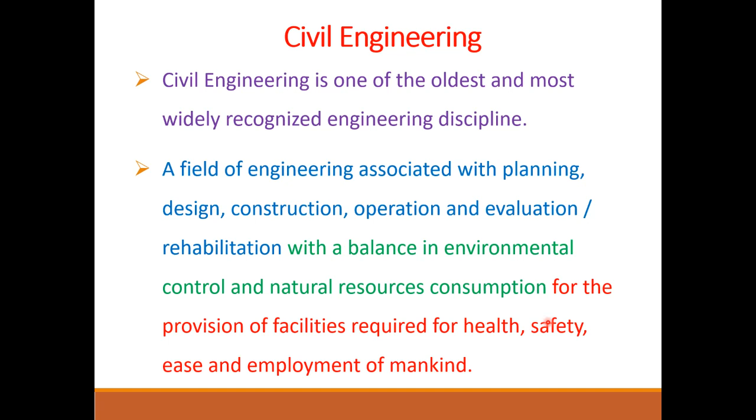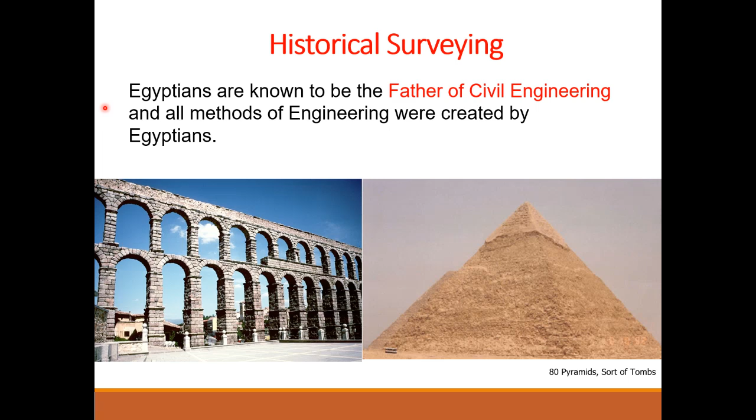Let us see some historical surveying. The earliest days in Egypt. Okay, you have already gone through these pictures. Ahram Misr, we say, historical surveying. Egyptians are known to be the father of civil engineering, and all methods of engineering were created by the Egyptians. From all the buildings of the world, pyramids seem to be the most mystical. Pyramid and secret, when typed into any search engine, will give you thousands of results without any problem, and the number of books, articles, movies, and video games with the name Pyramid in the title is not countable. But what is the mystery of the pyramids?

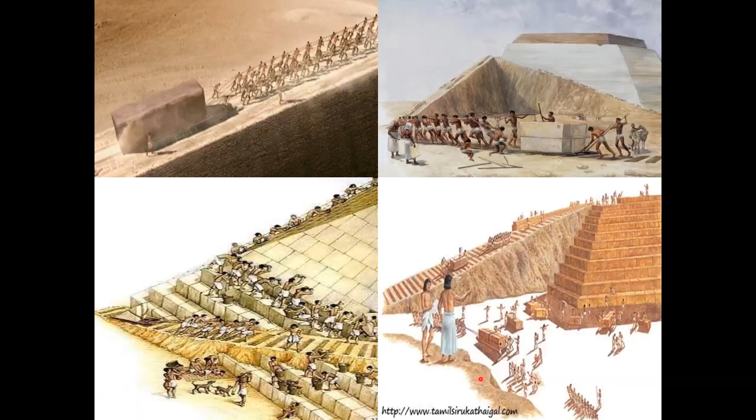So this was how the pyramids were constructed. Okay, this is an imagination. This is a hypothetical analysis of different scholars or analysts. You can say these are the assumptions that this is how the pyramids were created. You can see the size of these stones. Okay, it's a huge stone which is the unit of a pyramid. Just like we use bricks in our houses, these blocks were used in the construction of the pyramids. You can see a huge number of people that are pulling a single stone, or you can say a single brick or unit, to the specific place. So this was all the labor work that you can see in this particular slide. Now let us start with a proper definition of surveying.

Surveying or land surveying is a technique, profession, and science of accurately determining the terrestrial position of points, natural or man-made, and the distances and angles between them. Okay, terrestrial means related to the Earth, all the information related to the Earth.

In simplest words, I say that the calculation of these distances, horizontal distances, and angular measurements between these distances comes under the category of surveying. I repeat, the calculation of different distances and the angles between these distances. This is simply surveying.

Okay, distances are taken in terms of different points on the earth. These points, the calculations we are dealing with, can be natural or man-made. These mountains are natural, trees are natural, but when we talk about the buildings, it is man-made or artificial. Similarly, the canals, the dams, the bridges, all these structures are man-made.

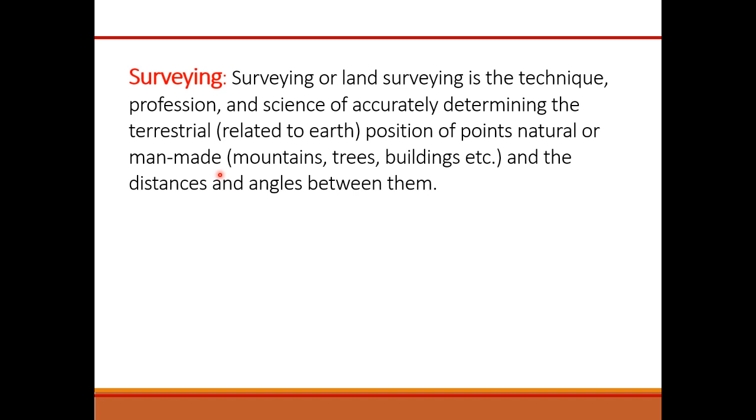Normally, determining the position in horizontal plane is called surveying. Determining relative heights or depths is called leveling. Surveying and leveling are almost the same, but there is a slight difference. Surveying deals with the horizontal calculations and leveling deals with the positions in vertical plane. Or you can say that the calculations involved in vertical heights are known as leveling.

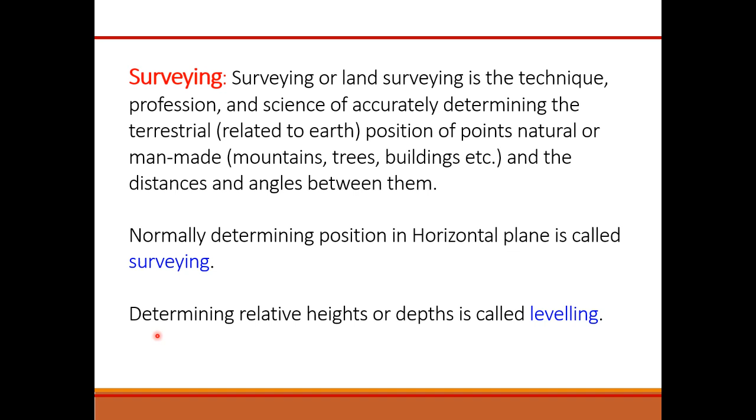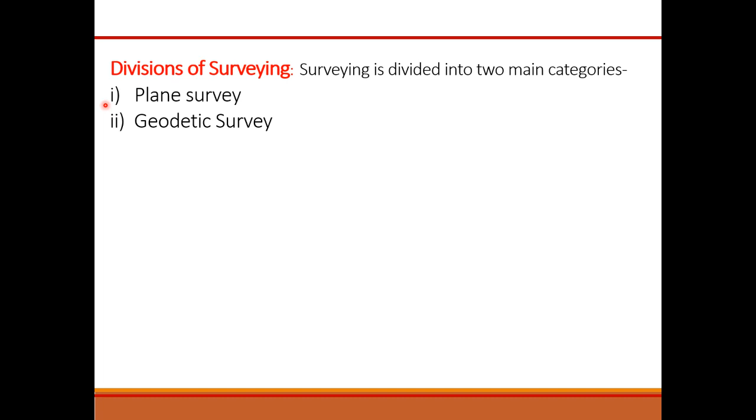Okay, divisions of surveying. Surveying is basically divided into two major categories. The first one is the plane survey and the second one is geodetic survey. What is plane survey? It assumes that the earth is flat. For small projects covering an area less than 250 square kilometers, earth curvature is not counted in distances. Earth's surface is considered as flat, not curved, not in 3D, not in spherical shape.

Geodetic survey. In this type of surveying, Earth is considered to be spherical. When the survey extends over large areas equal to or more than 250 square kilometers and the degree of accuracy is also great, the curvature of Earth is also taken into account.

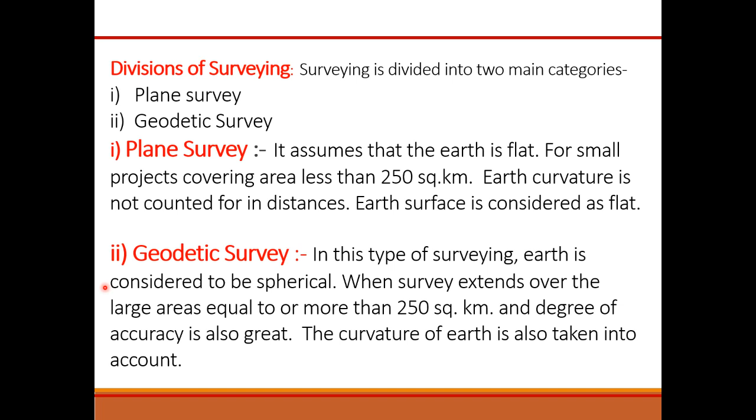Now we are going to discuss the basic differences between plane surveying and geodetic surveying. In a triangle having an area of 75 square miles, the difference between the sum of the three ellipsoidal angles and three plane angles is only about 1 second. What does it mean? If you assume a triangle of 75 square miles and take two different sets of angular readings, one the plane angles and the other the three ellipsoidal angles of a triangle, meaning three-dimensional and two-dimensional angles, there would be a difference of only 1 second.

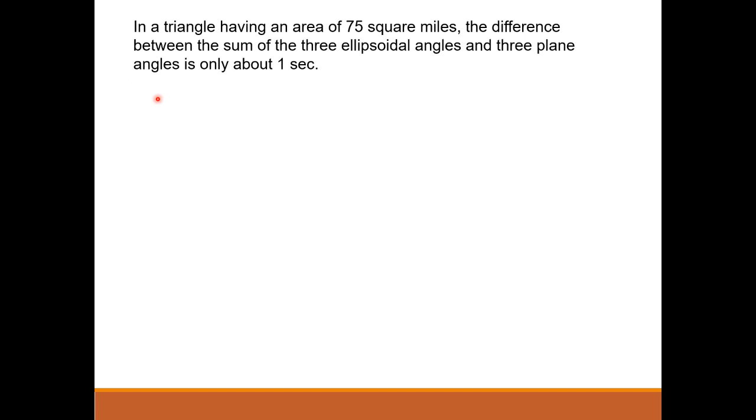Plane surveying and geodetic surveying differences. First, curvature of the earth is not taken into consideration in plane surveying, while the reverse is the case in geodetic surveying. Second, in plane surveying, the line joining any 2 points of the triangle formed by any 3 points is considered as a straight line of a plane triangle, and angles formed are assumed to be plane angles. In geodetic surveying, the line joining 2 points of a triangle formed by 3 points is considered as a curved line of a spherical triangle, and angles formed are considered as spherical angles.

In plane surveying, the area of consideration is less than 250 square kilometers, while geodetic surveying is done on large areas equal to or greater than 250 square kilometers. Plane surveying requires lower accuracy, while a high degree of accuracy is required in geodetic surveying. Simple methods and instruments can be used as low accuracy is required, while in geodetic surveying, very refined methods and instruments are used.

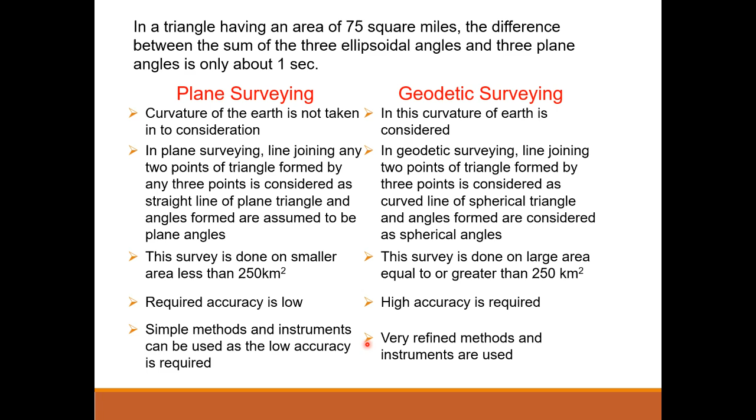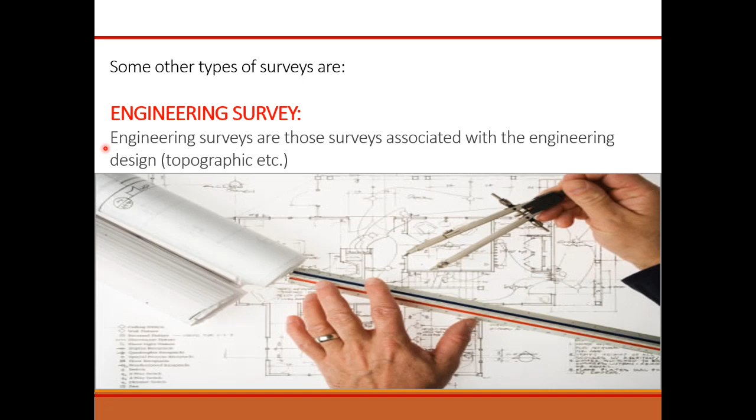Okay, there are some types of surveys. First is the engineering survey. Engineering surveys are those surveys associated with engineering design. This is also known as topographic survey. You can also define topographic surveys as those in which we collect information about the natural and man-made features of the land.

I have already discussed what the natural features can be: a stream, a lake, a forest, trees, mountains, hilly areas or plain areas. All these are natural features. While for man-made features, all civil engineering structures are called man-made structures: the bridges, the culverts, the roads, the sewerage, all these.

So strata is changed as you go deep beneath the earth. So the knowledge of earth and underneath is known as the geological survey. Next is the archaeological survey, to collect the information about the location, distribution, and organization of past human cultures.

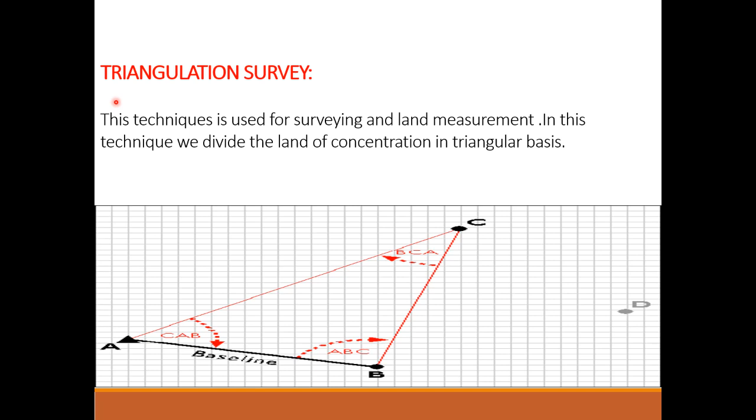Triangulation survey. This technique is used for surveying and land measurement. In this technique, we divide the land of concentration in triangular bases. Okay, the whole area to be surveyed is divided into a number of triangles, and then using all these triangles, the area is surveyed. It is a very basic and easy technique.

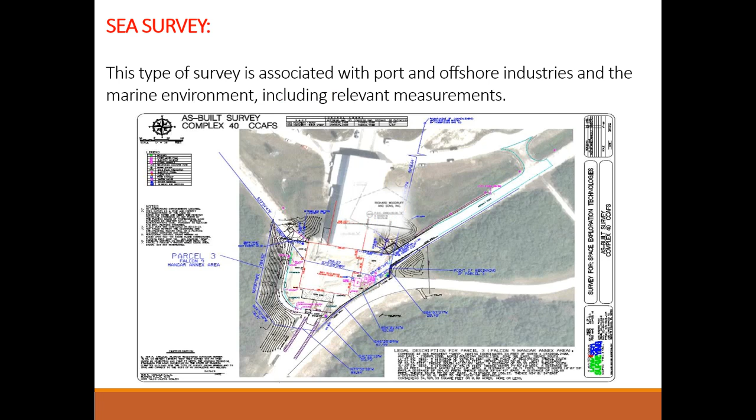Hydrographic survey. Hydrographic surveys define shorelines and depths of lakes, streams, oceans, and reservoirs, etc. Sea survey. This type of survey is associated with port and offshore industries and the marine environment, including relevant measurements. So, this is a plan view of a dock or harbor, and this is all the sea survey. Alignment survey. Route surveys are made to plan, design, and construct highways, railroads, pipelines, and other linear projects.

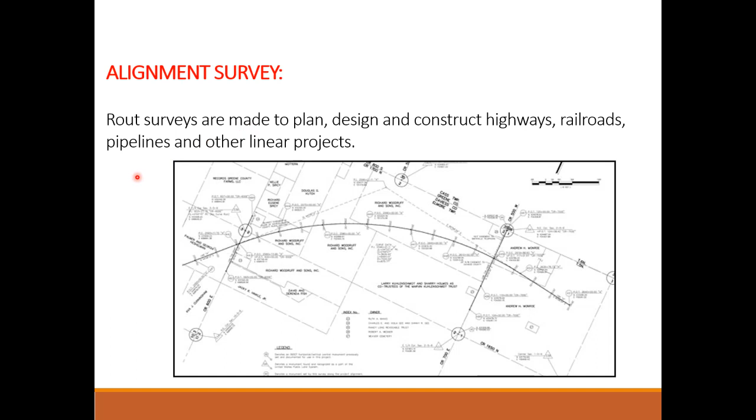Aerial survey is a geomatics method of collecting information by using aerial photography, lidar, or from remote sensing imagery using other bands of the electromagnetic spectrum such as infrared, gamma, or ultraviolet. It can also refer to the chart or map made by analyzing a region from the air.

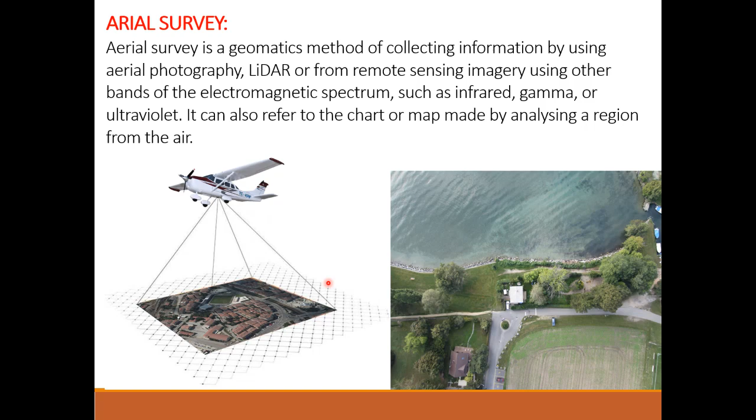Okay, so here you can see a plane is flying. In modern days, you also observe that there are different types and different models of drones. They also fulfill the same purpose that was initially fulfilled by the planes. So what does the drone do actually? This is the area it is covering. As you can see, it records the ground surface as in a video form. So this is the aerial survey. Okay, these are different photos taken by using some drone or helicopter or a plane. This is what all about the aerial survey.

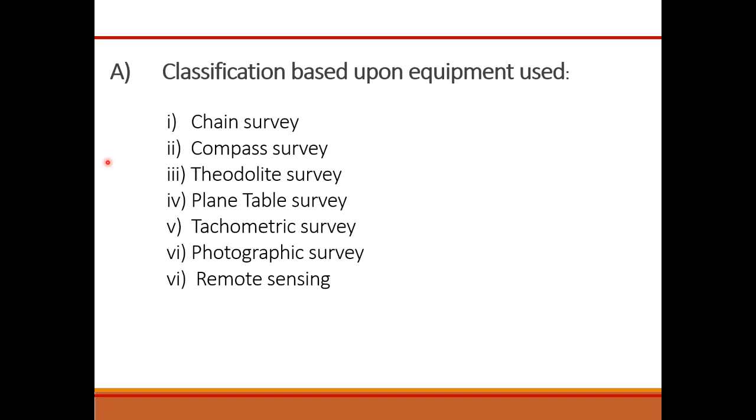Now the classification based upon equipment used. Chain survey, compass survey, theodolite survey, plane table survey, tachometric survey, photographic survey, and remote sensing. All these are different techniques that we use in survey. Based upon the method employed, the different types of surveys are triangulation: control points are established through a network of triangles; traversing: scheme of control points consisting of series of connected lines. We shall discuss all of these in very much detail in the upcoming lectures.

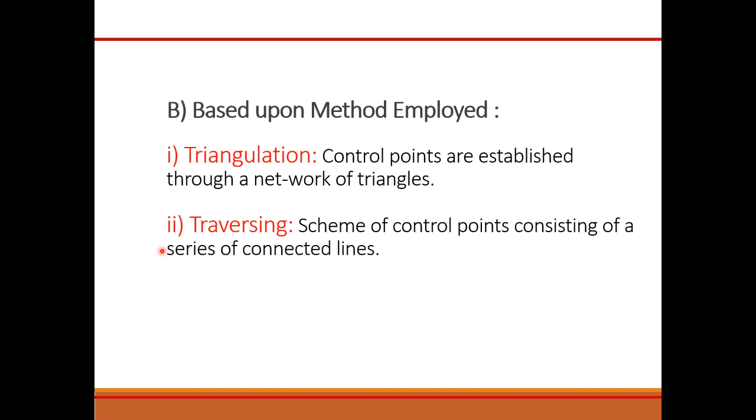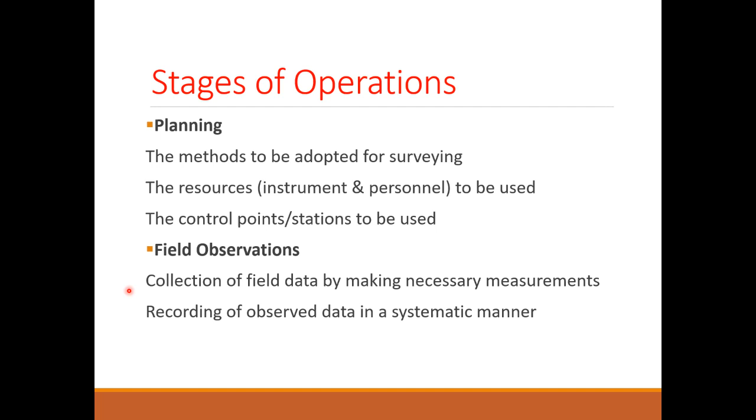Now, stages of operations. First is the planning: the methods to be adopted for surveying, the resources, instrument and personnel to be used, the control points, stations to be used. Field observations: collection of field data by making necessary measurements, recording of observed data in a systematic manner. Office works include the processing, analyzing, and calculations of observed data, preparation of necessary data for making a plan or map of the area, computation of relevant field parameters as per design for setting out engineering works at site.

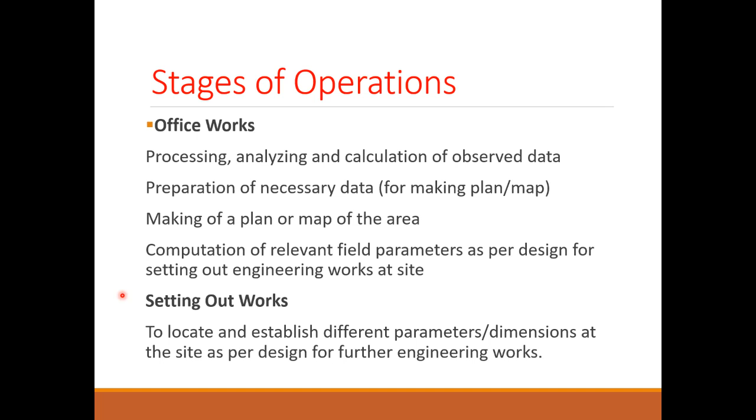Setting out works: to locate and establish different parameters, dimensions at the site as per design for further engineering works, to analyze and to calculate the field parameters for setting out operation of actual engineering works, to set out field parameters at the site for further engineering works. So all these are different stages of operations.

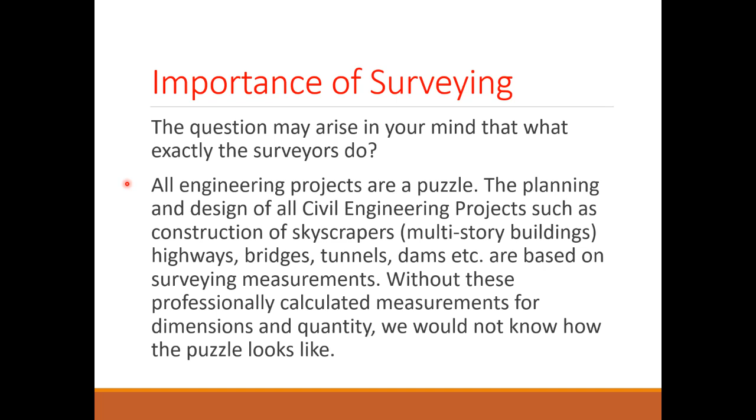Importance of surveying. The question may arise in your mind that what exactly the surveyors do. All engineering projects are a puzzle. The planning and design of all civil engineering projects such as construction of skyscrapers, highways, bridges, tunnels, dams, etc. are based on the surveying measurements. Without these professionally calculated measurements for dimensions and quantity, we would not know how the puzzle looks like. Moreover, during execution, a project of any magnitude is constructed along the lines and points established by surveying. Thus, surveying is a basic requirement for all the civil engineering projects.

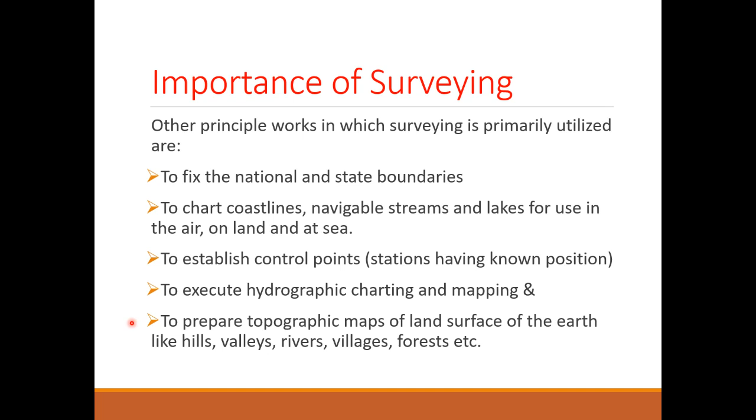Importance of surveying. Other principal works in which surveying is primarily utilized are to fix the national and state boundaries, to chart coastlines, navigable streams, and lakes for use in the air, on land, and at sea as well, to establish control points or stations having known positions, to execute hydrographic charting and mapping, to prepare topographic maps of land surface of the earth like hills, valleys, rivers, villages, forests, etc.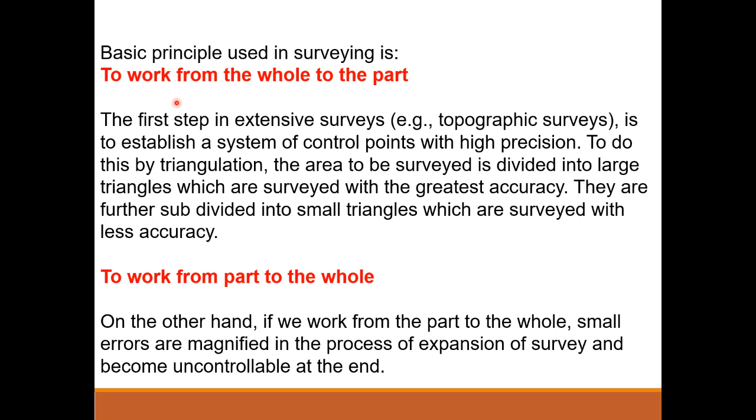Surveying safety. Surveyors, geomatics engineers, generally are involved in both field work and office work. The fieldwork consists in making observations with various types of instruments to either determine the relative locations of points or to guide the building and construction work in accordance with the planned locations.

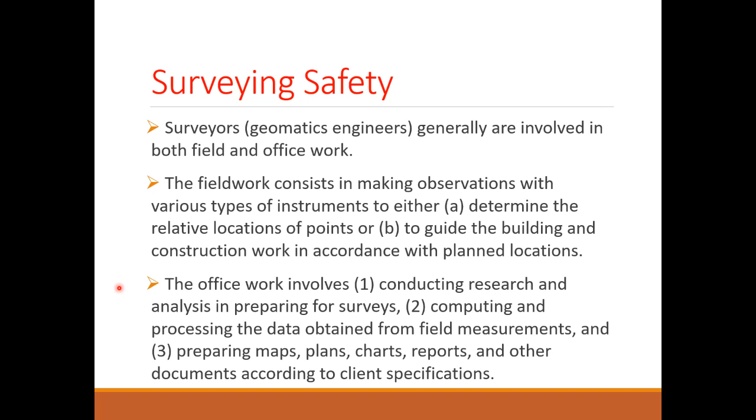The office work involves conducting research and analysis in preparing for surveys, computing and processing the data obtained from the field measurements, and preparing maps, plans, charts, reports, and other documents according to clients' specifications. Sometimes the fieldwork must be performed in hostile or dangerous environments, and thus it is very important to be aware of the need to practice safety precautions.

Among the most dangerous of circumstances within which surveyors must sometimes work are job sites that are either on or near highways or railroads, or that cross such facilities. Job sites in construction zones where heavy machinery is operating are also hazardous. In these situations, whenever possible, the surveys should be removed from the danger areas through careful planning and the use of offset lines.

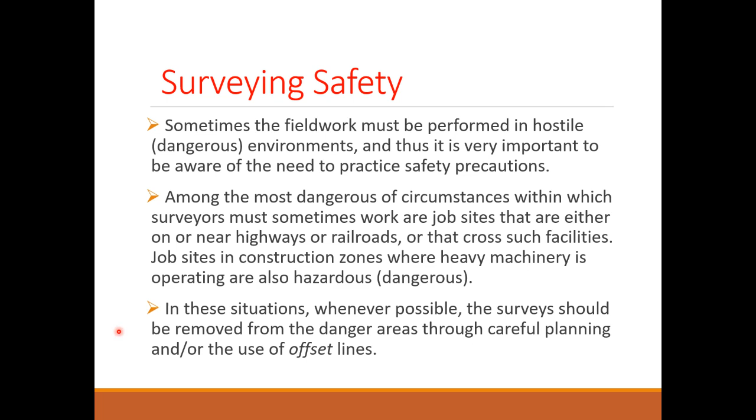If the work must be done in these hazardous areas, then certain safety precautions should be followed. Safety vests of fluorescent yellow colors should always be worn in these situations. You may have seen these yellow, orange or light green colored vests that the surveyors wear while they're performing the survey.

Above described hazards can be time dependent. These include problems related to weather such as frostbite and overexposure to the sun's rays, which can cause skin cancers, sunburns, and heat stroke. To help prevent these problems, plenty of fluids should be drunk, large hats and sunscreen can be worn, and on extremely hot days, surveying should be commenced at dawn and terminated at midday or early afternoon.

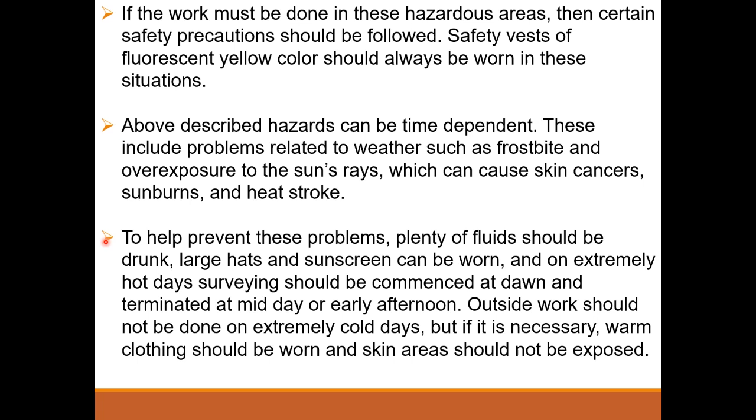Outside work should not be done on extremely cold days, but if it is very necessary, warm clothing should be worn and skin areas should not be exposed.

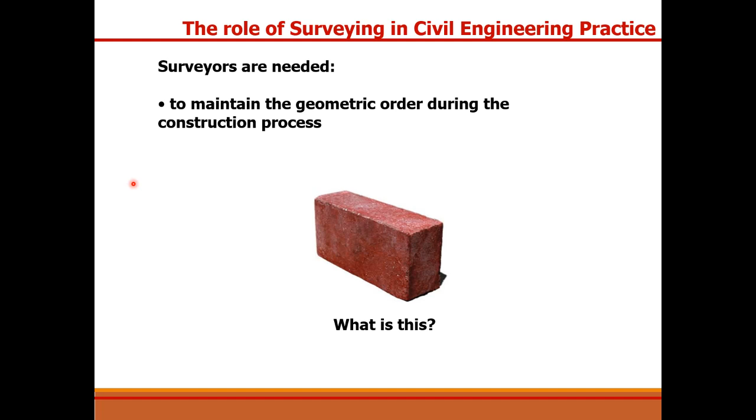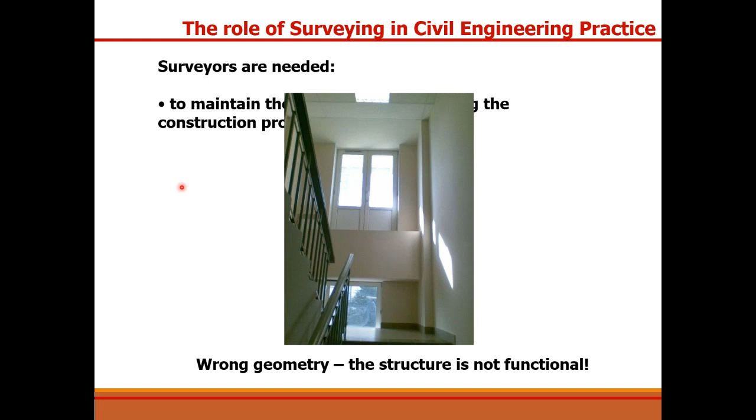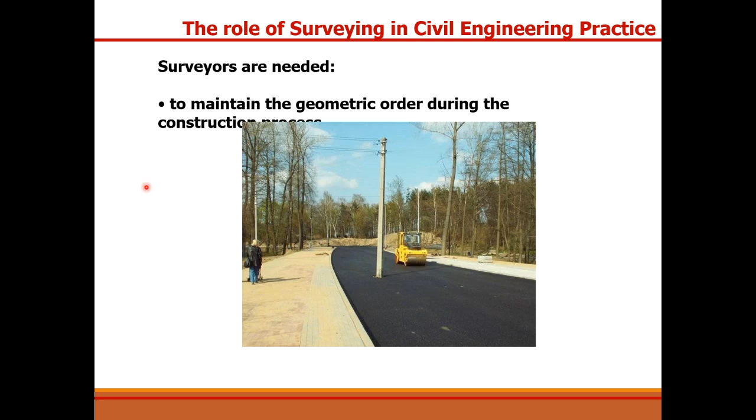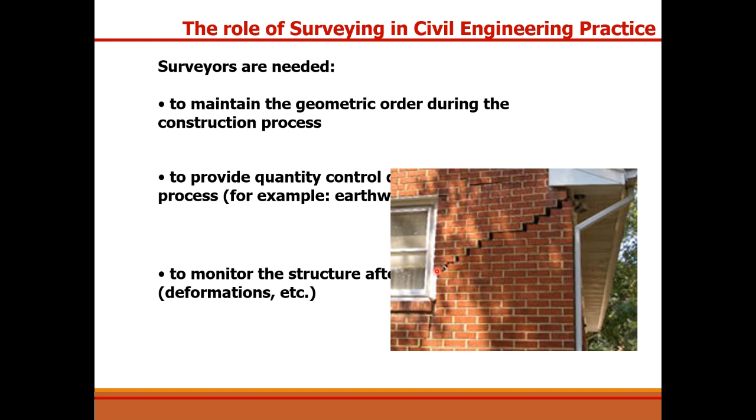To provide quantity control during the construction process, for example, earthwork quantities, and to monitor the structure after the construction, deformations, etc. Here you can see a visible crack. It is produced due to the deformation or settlement in the foundation. So these all are the considerations of the surveyor.